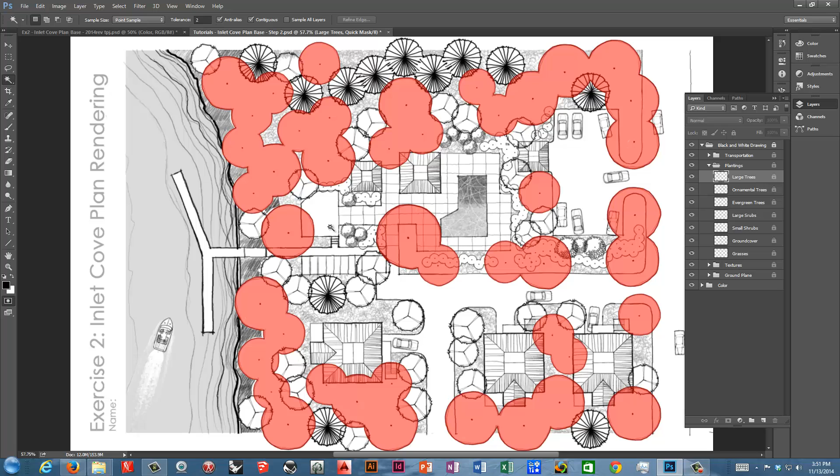So if I go to select and inverse that, check quick mask again, now you can see I have just the trees themselves selected, and that's exactly what I want.

So I go back to regular selection mode, close this up, go to color, plants, large trees, base, and next I'm going to select the color and start on this color scheme. I'm going to make sure everything is pretty light, and maybe shift a little more towards the yellow green there, kind of a celery color.

Click OK, and there's a couple ways we can do this. We can select the paint bucket tool and click in there. We can go to edit, fill, and use foreground color and fill it that way. Or really the quickest way is to use the keyboard shortcut, which is simply pressing the Alt key down and backspace. Alt and backspace fills a selection or a layer with the foreground color, and Control backspace fills the selection or layer with the background color. In this case we want the foreground, so we use the Alt key. I'll repeat that as we go through these so you get the sequence.

When you fill it, because it's on the color layers below, you can see that the lines of the trees are still showing through. It's not covered up, all the line work is still visible, and that's exactly the way it should be. So I'm done with that one.

I'll close that, open this one, go back to my black and white layers, choose ornamental trees, magic wand. My settings are still the same. Click outside, inverse, check it. I've got all this medium or ornamental trees.

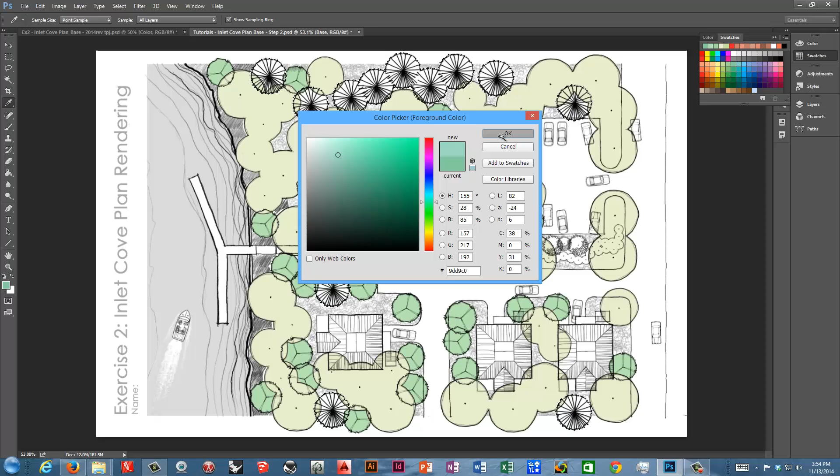And we do the Alt backspace, but first we need to pick our color, and again I'm sliding over a little more into the blue-green for the evergreens, and you can see, so maybe I'll push that a little bit up there, a little bit lighter, and Alt backspace to fill that.

So again, I'll come back, maybe that's not quite enough contrast in there, but we can come back and make that adjustment. I'm going to use my Control D shortcut to deselect that.

Go back to my layers, close that one, large shrubs base layer, come back up here, large shrubs, click outside, inverse, I'll check it just to show that that's what I've selected. Close this, come back down to large shrubs, pick my color.

In this case I'm going to stay with a green, medium green, and maybe I'm going to reduce the chroma of that a little bit, and then do my Alt backspace, and got that filled in.

Back to my layers, close that one, open small shrubs, go back to my black and white drawing layers, go to small shrubs, click, inverse, close that one, go down to my base here.

And I think in this case I'm going to actually pick kind of a lavender color that's a complementary accent, and I can shift that a little bit later on, but as a principle I'm going to use a little bit of a different color there because this pool area is kind of the key feature of this community center, the pool and the dock. And the dock will have boats and the water color, so I need something to kind of pull the eye into that centerpiece there.

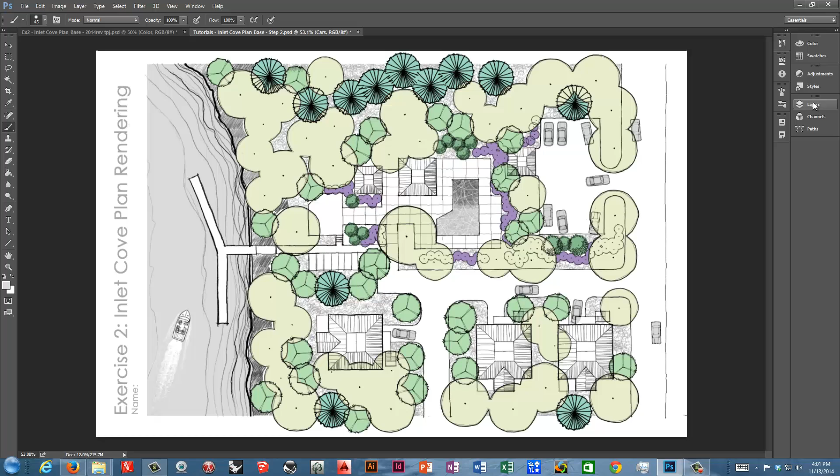So the first thing I'm going to do is turn off my color layers for right now. And I'm going to go and turn the texture layers off. And I think under plantings, I actually have grass, the ground cover texture. I'm going to turn that off.

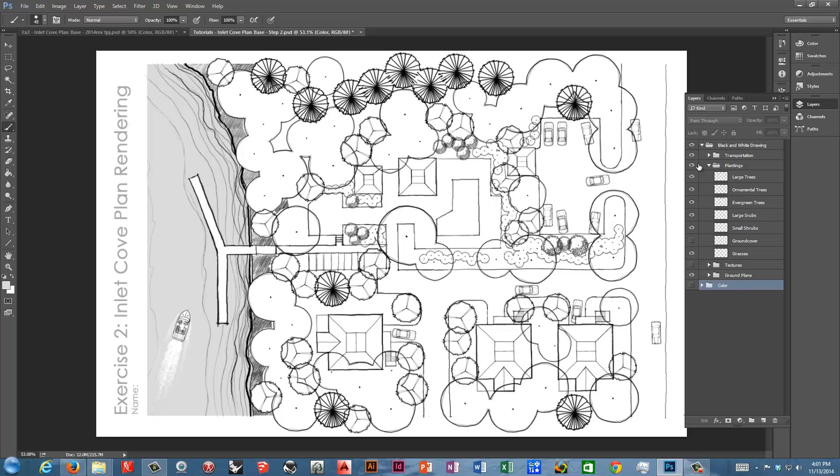And then I'm going to turn all the plantings off and transportation, because what I really want to see here is all the ground plane elements. And I put a layer in here, I think for this purpose, in the ground plane called border. And that's an empty layer.

And what I want to do with that is pick a black color, use my line tool, and make sure this is set in pixels. Two pixels wide, that's good. And what I'm going to do is draw a line with the shift key down and just go right across these areas, lining up with the edge of this grayscale. Click, shift, drag, and then I'm going to zoom in on this over here.

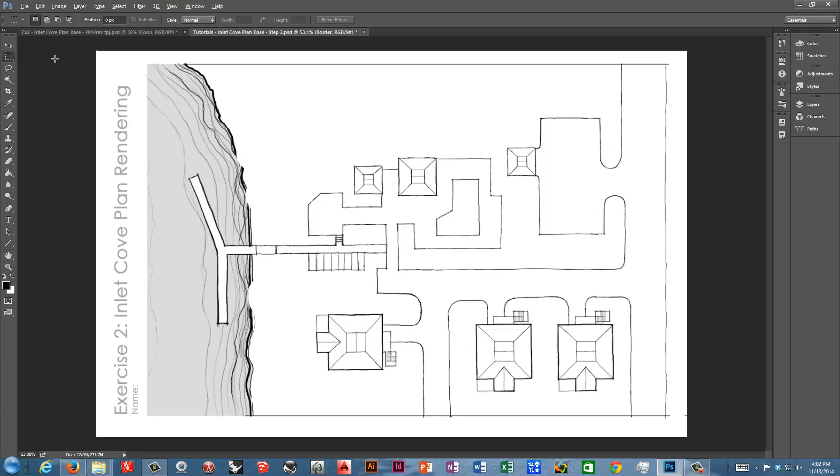I need to make sure that's connected, and it looks like it is. It can be over, that's okay. It's just, if there's a gap there, my filling is going to move outside the boundary.

There's a couple little spots I'm missing here, you can tell because there's a little bit of sparkle. Let's try that again. There's some light gray areas on one of those layers, so it's missing those spots. Really what I wanted to do is fill in all the way around there.

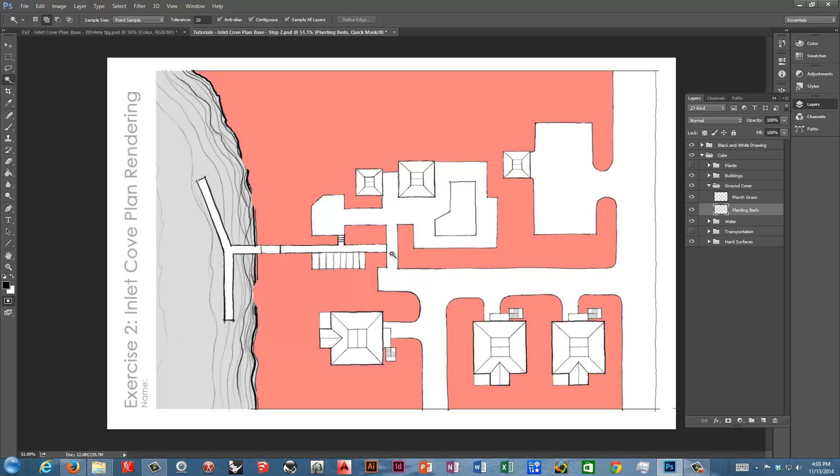So that's basically the area that's going to have the ground cover that runs along underneath everything. I'm going to go to planting beds.

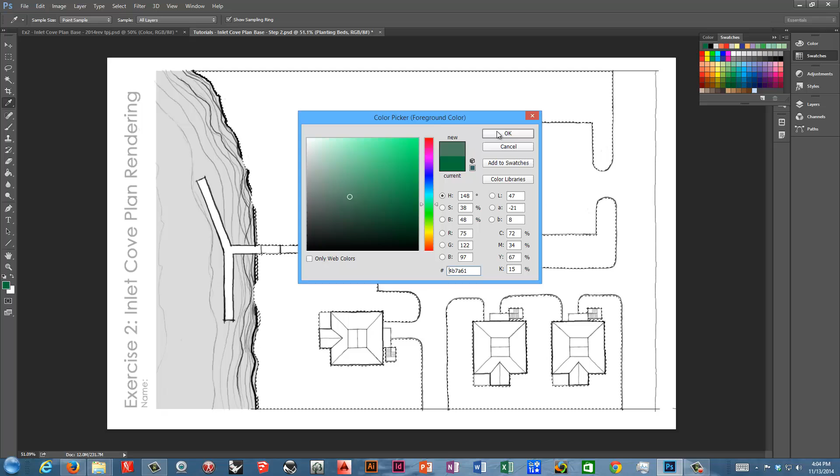I'll pick a darker, middle green color for this. All these colors in the color wheel are kind of high chroma, so I am going to reduce that chroma down and then do my Alt backspace, although I will double check again. I'm in the color group, ground cover, planting beds, Alt backspace, there we go. So I've got that filled in.

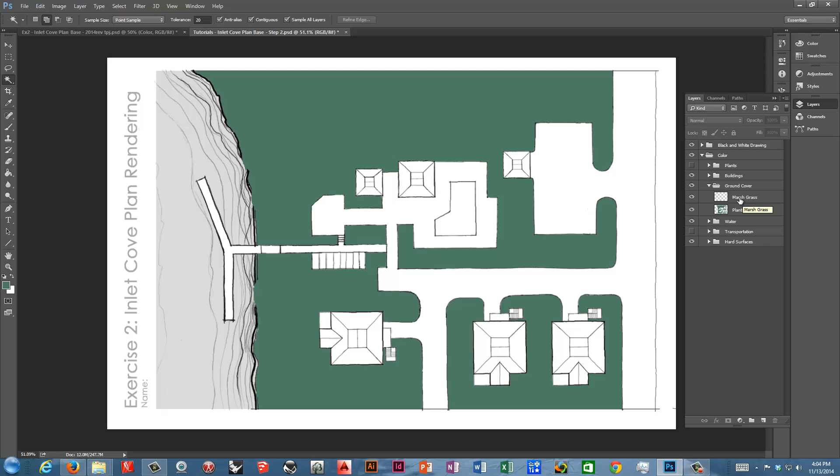I can deselect that. Then the other area I had, this one is a little hard to see, so I'll put my textures on. It's in the plantings, so I may have to turn these off and leave the ground cover off and the grasses on, so you can see the area that has the grasses in it.

The easiest thing to do with that is just make a selection using your pen and the lasso tool. I'm going to come through here. I'm not really worried about where else it's showing up because there are trees over top of that, so I'm just going to come up right through here. Because I can fix this later, I can erase it and clean it up a little bit, not too worried about it.

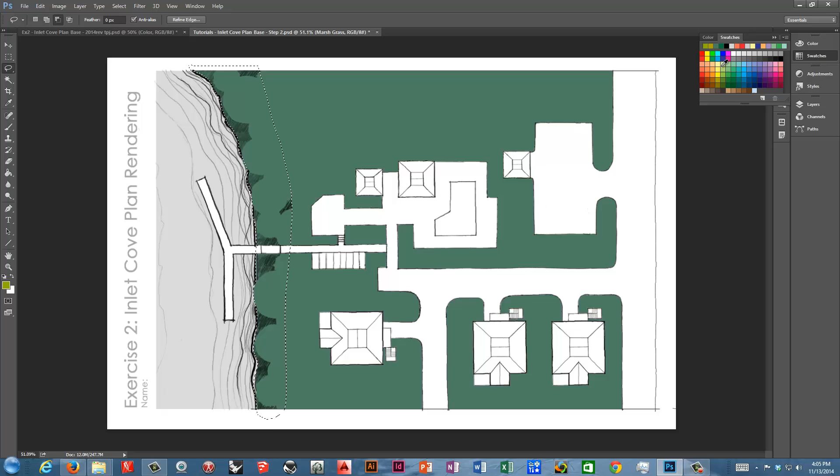So I'm going to close that group, marsh grass, pick a little more of a yellow green. I'll probably start here and then adjust that a little bit more to the green. Double check my layer, yes I'm on marsh grass, Alt backspace, there we go. Like I said, I wasn't very careful with that.

Since I'm on that layer now, I can get my rectangular selection marquee, select down here, just hit backspace, start here, select over, backspace, clean that up. Sometimes this approach works just fine, so don't worry if you go over a little bit.

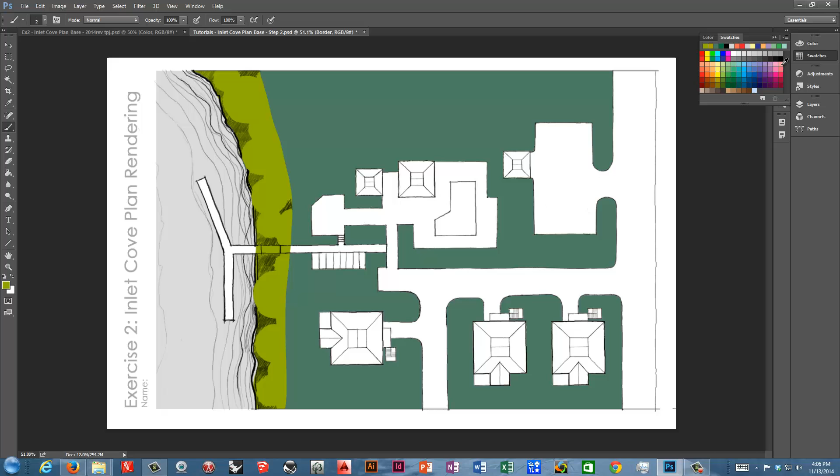I can do the same thing now for my buildings and my pool and my paving. One of the things I mentioned before, let's go back down to our border layer. I get my brush tool, maybe a 2-pixel brush, go with black color, zoom in a little bit.

There's actually supposed to be a line between here and here, so this is road and this is pool paving. And this pool paving, let's just say it goes all the way up to here. That wasn't real good, so I'll try that again. There we go, a little better.

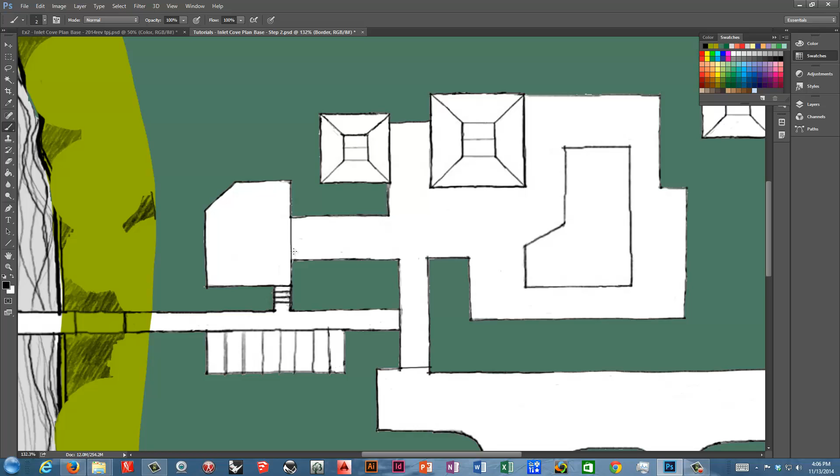So I'm drawing a couple extra lines in there to make sure that when I use the magic wand, everything stays where it's supposed to. All right, so that's going to work pretty well.

Now I'm going to turn those couple color layers off, ground cover off, and plantings off. So under ground cover, done with that, I've got hard surfaces. Dock and decking, well, let's just do pool paving first.

In this case, I can make a selection, but I could also just use the paint bucket. That's in this row, if you see the gradient tool, paint bucket.

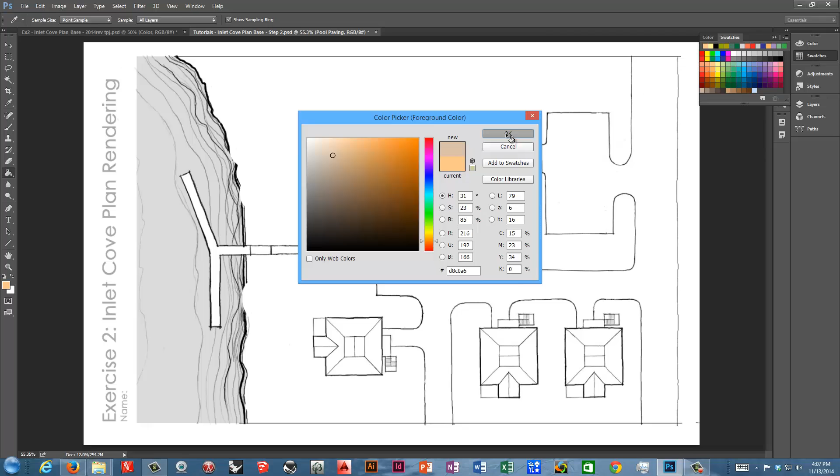So I'm going to choose a paint bucket, swatches. I am going to pick a light—well, this is the decking, right? So I'm going to pick kind of a light orange, tone that down a bit, kind of a little tan for the wood. And I can just come in here as long as I'm on the correct layer—pool paving, let's go to dock and decking.

Oopsies, that didn't work very well. I have to make sure I check contiguous and all layers. Now I can just click and fill in these areas. Now, because what I'm doing here, it is kind of going around these lines, and probably for what I'm doing that's not a big deal.

But I could also just switch back to my paintbrush. Let's make that a little bit bigger, and just come in here and quickly paint over that. Okay, paint over this, just make sure that's actually filled in. These steps didn't get selected, so it's a little easier and faster just to come in and do that. Okay, so I've got that color filled in.

Pool paving, same thing—I'm going to pick up my paint bucket. I'll select a different color. Now maybe this one I'm going to go with more of a light gray. I'm not sure what that's going to be. Click in there—there you go. Have that in the pool paving.

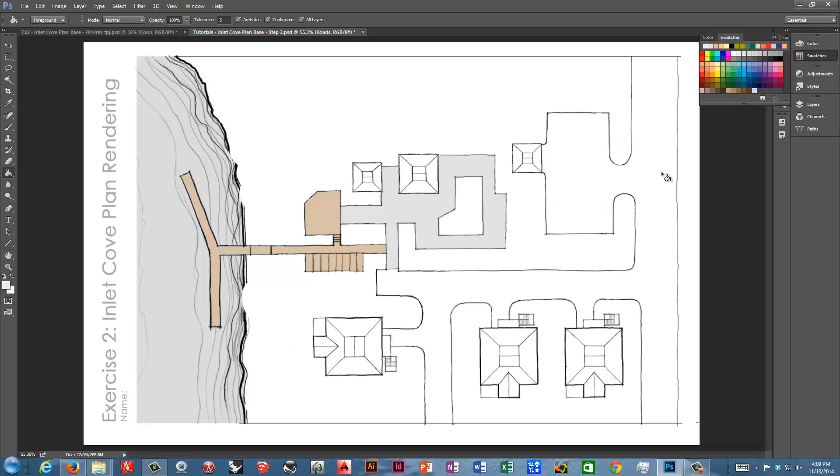Roads. For roads, although I know everyone thinks asphalt is black and therefore it should be dark, asphalt in an aerial photo, actually, because there's a lot of reflectivity and there's aggregate in there that reflects light, it actually ends up being fairly light.

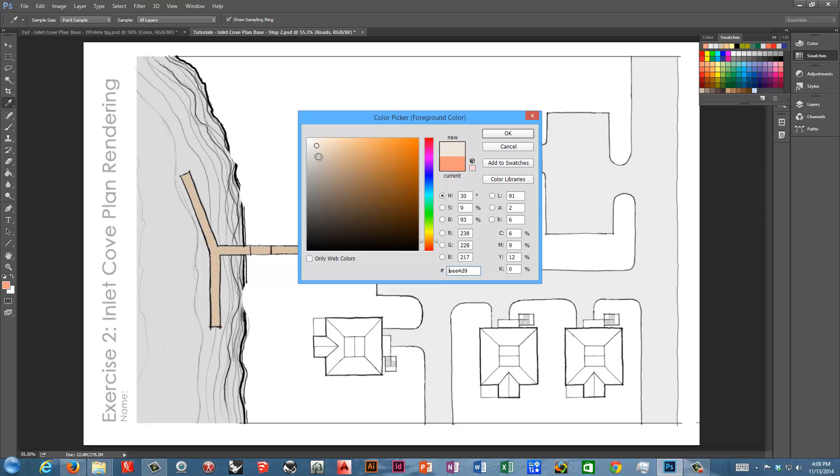So if I want to get some contrast between here and here, maybe what I'm going to do is go back to my red and get a very faint, kind of warm color—still fairly light—but now I'm going to go to pool paving and change that. That way the pool paving is separated from the deck, but it's also separated from the roadway, which is a good thing.

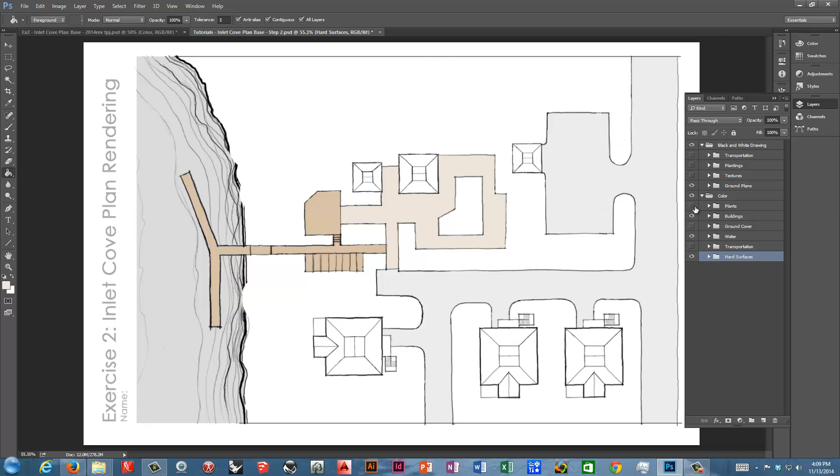All right, and then the last things it looks like we have to do in here—if we get our plants back on, our ground cover back in there. We've really got the buildings and transportation, we can see that in there. Hard surfaces. And again, don't worry if this is really light—I think that is the best way to do it. So let's come in here. We could do the water next.

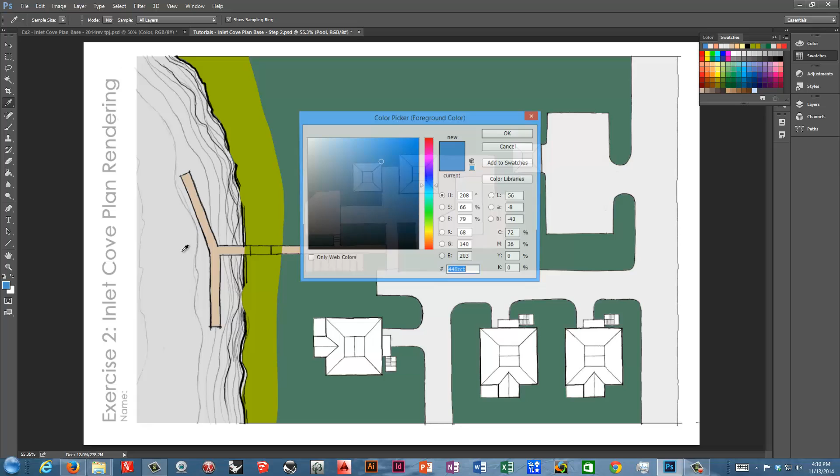Go to water—now the pool, simple enough. Let's get a watercolor and maybe start with that kind of light blue. Just click in there. And for the river, on the ground plane layer, there's this layer here.

So I'll just alt-click on that. Now once you fill that, for future clarity, let's go ahead and turn this off, because the grayscale is going to change the way the color looks and I don't really need to see that anymore. It's like some of the other textures. Once I fill this in the next tutorial, number 3, you'll see how we fill this in.

Okay, so basically we've got everything done except the buildings, and we go to the decks. So maybe I'll hold the Alt key down, pick up this color, and let's get rid of our selection. Click here, here, here—again, I'll have to paint that in by hand. Click all these larger areas. And then let's switch over to our paintbrush.

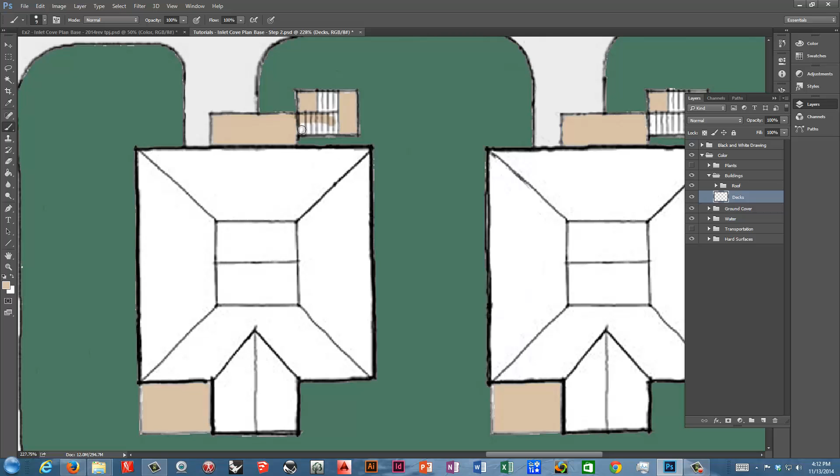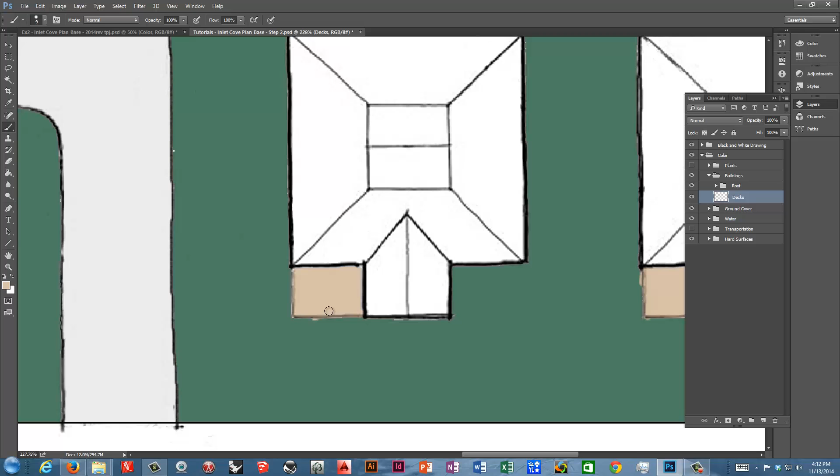Zoom in a little bit. Let's make this a little smaller. Again, it doesn't have to be perfect everywhere—if you go over a little bit, it's okay. If I got space, just pick that over there. You can fix any selections that didn't go over the lines there. That's one of the things about using the paint bucket—it doesn't quite cover.

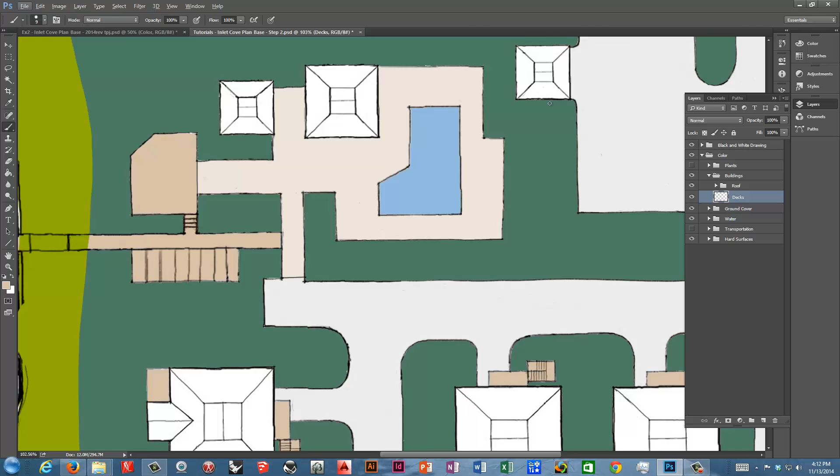So you don't really want to have any white color gaps. I'd rather see—I can come in with the eraser, since we're on a separate layer, and just erase that. All right, let's zoom out. Sorry, let's go back over to here. I think that's it. That looks pretty good. And then we can go to the roof.

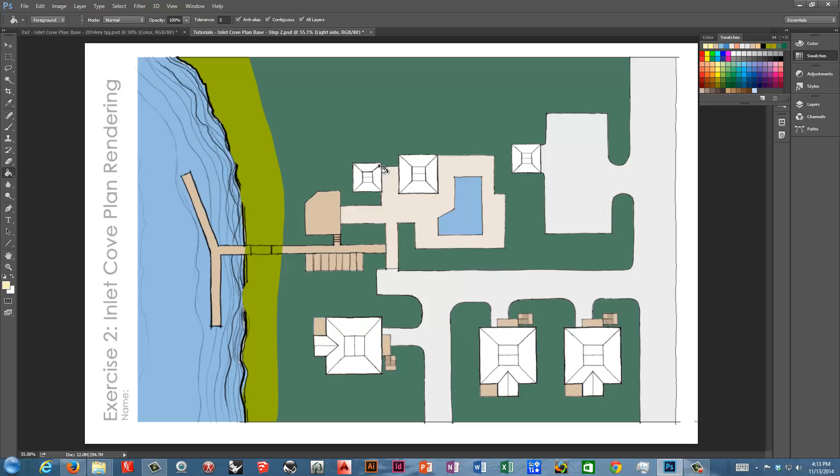And light side, let's pick something that's maybe a little more in the yellow range. We'll warm that up a bit, but still keep it pretty light. And go back to my paint bucket. Light side, there, there, there, there, there, there, there, there. Now these top pieces are slightly different, so I was going to do light, light, light, light, light, and light.

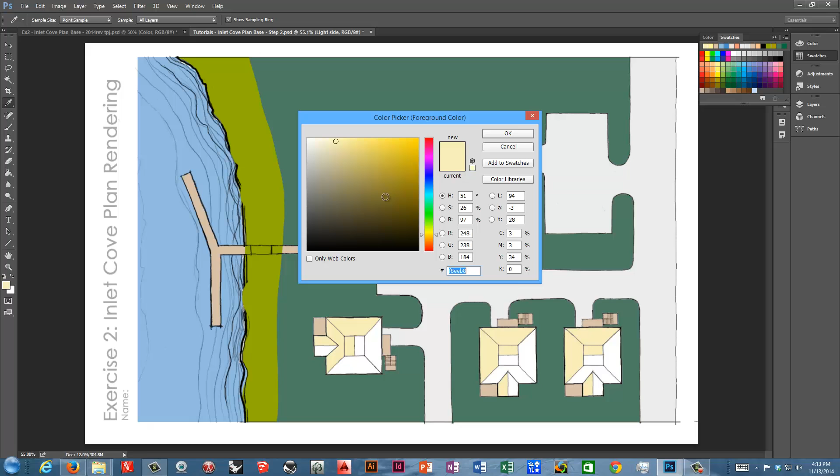Now, when I'm going to create the shaded version of this, instead of trying to pick another color, I already have a hue selected. So I'm going to tap on my color chip and just slide down within that same hue, and then I can come in here and fill anything that's not colored.

And again, this set kind of has the same issue a little bit, that it's not really filling over. So if I wanted to really make that look better, I'd come in here with my paintbrush once I have that done. And at least these lines that are kind of going through there, fill them in, because I want to be able to see that. I don't want that to look kind of faded. I really want to see that black line kind of showing up in there.

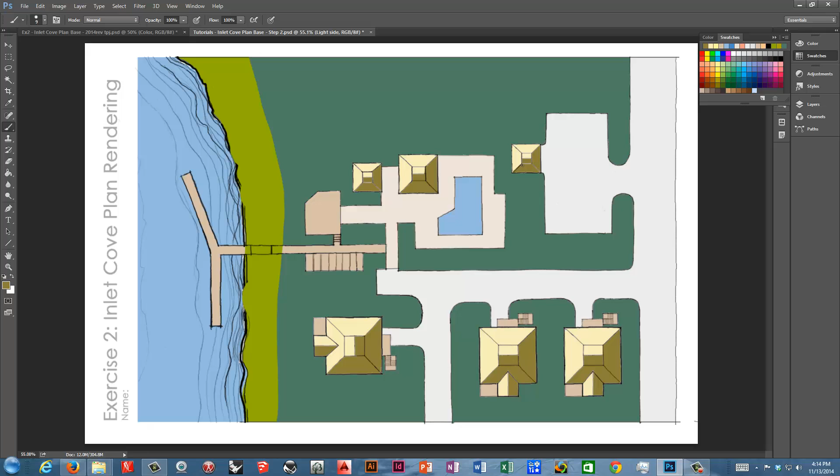That wasn't quite as good as I'd hoped. Anyway, you get the idea. I'm going to come in there, just catch that edge. Okay, and we can come back and do some other adjustments. I'm not going to take the time now to make everything perfect, but you get the idea. We do want to see those black lines, so just come right up along there, and same thing with this one, maybe come right along there.

Okay, so that's the buildings, and I think that's pretty much everything we have in here. So let's go to color, turn on the plants, turn on the transportation. Let's go back up here, turn all this back on. I think under plantings, I had turned these off individually. So if you did your job right, this is what it should look like.

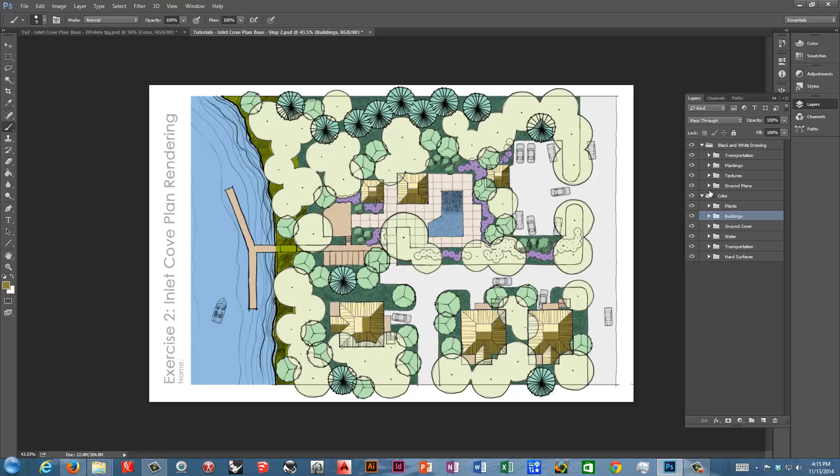And you can see all the dark lines are still visible. And the colors are there. And the idea that we're looking for here is, when you look at this, you should see groups of things. The buildings should pop out as a group of buildings. The decking should be an entity. Within the plants, you should see 1, 2, 3 types of major plants, and then 2 types of smaller plants. So we're trying to get this grouping so your eye sees that and it picks that up.

Now, a couple places like this, right now, this is kind of coming over the deck, and that shouldn't be. So the reason for that is under hard surfaces, we've got dock and decking. Okay, and then up here we've got our ground cover layer. So what I need to do is move that ground cover layer down below, and now that's going to cover that up. And this should look the same way.

The large trees should cover the medium trees and the evergreens, and the medium trees should cover the bottom of the evergreen trees. So that's just a matter of shifting these layers to make sure that works. So that's the basic process of taking this first pass.

And next time we'll look at textures, and we'll talk a little bit more about making color adjustments. If you really decide that there's not enough contrast with these medium plants here, you can go to the medium trees, pick the base, choose image, adjustments, and hue saturation, and then you can start shifting this hue around.

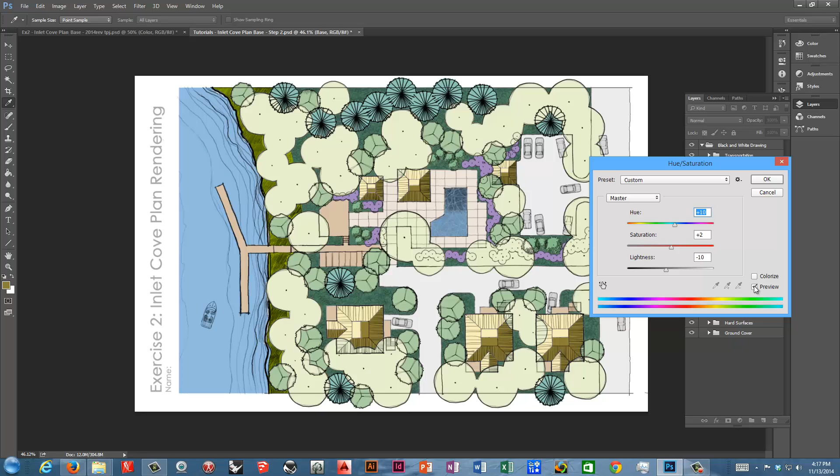So we can make those kind of color adjustments to make sure things really stand out. Down here on the ground cover layer under marsh grass, you can see this is kind of sticking out here a bit, so I'm just going to go with my eraser and erase that out. Any place you see a line that needs cleaned up, you can go through and take care of that. But the stacking order should take care of most of it.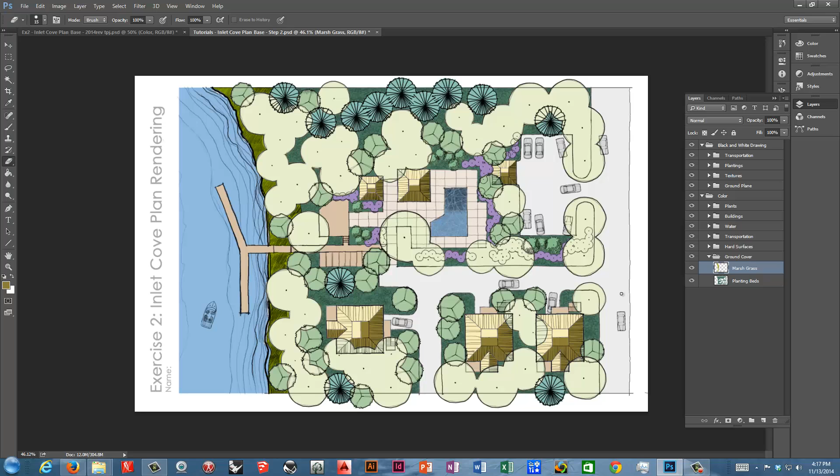So that's the process we're going through. Create that initial color composition, fill all the base layers in your color layer group, and in the next tutorial we'll go on to talk about how you start adding shading and textures.